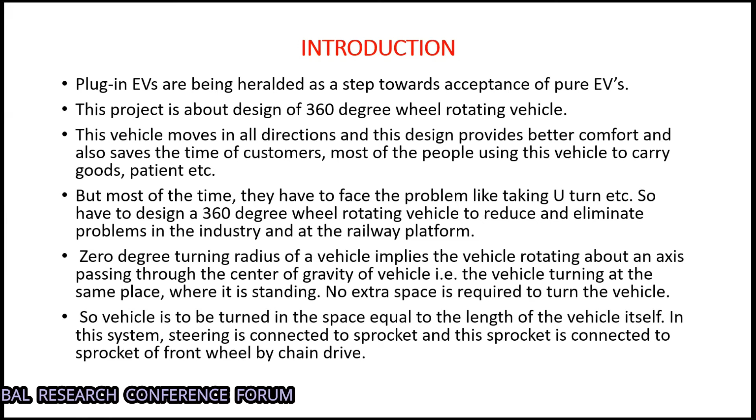In the system, steering is connected to a sprocket and this sprocket is connected to the sprocket of the front wheel by chain drive. Concept and technology. The steering sprocket is used to provide the direction of the front wheel. The DC motor is connected to a sprocket above the frame. When power supply from the battery is connected to the DC motor, rotary motion will be transferred from the DC motor to the wheel.

The bearings are provided below the sprocket, which allow the wheel rotation of 360 degrees about the vertical axis. Then the same rotary motion is transferred to the rear wheels by sprockets and chain drive arrangement. As a result, this arrangement allows the vehicle wheels to turn 90 degrees left and 90 degrees right from the original position, but the front wheel of this vehicle rotates 360 degrees by the steering sprocket and chain drive arrangement without moving from the spot, that is, the wheel has zero turning radius. This helps in maneuvering the vehicle in tight spaces such as parking lots and small compounds.

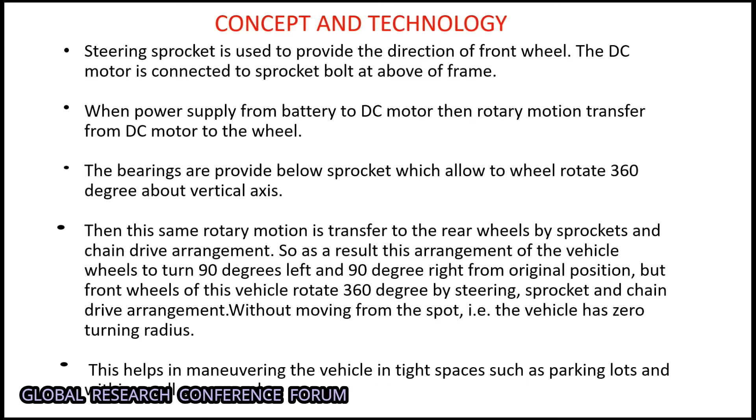Abhishek, next. The various functions of the steering wheel are to control the angular motion of the wheels, the direction of motion of the vehicle, to provide directional stability of the vehicle going straight ahead, and to facilitate the straight ahead condition of the vehicle after completing a turn. The road irregularities must be damped to the maximum possible extent. This coexists with the road feel for the driver so he can feel the road condition without experiencing the effect of moving over it.

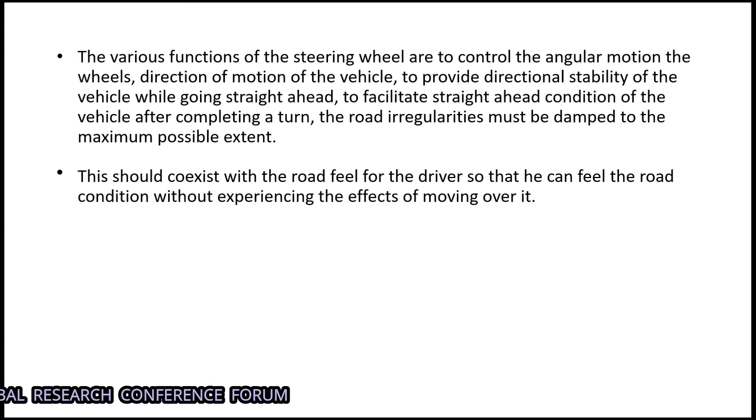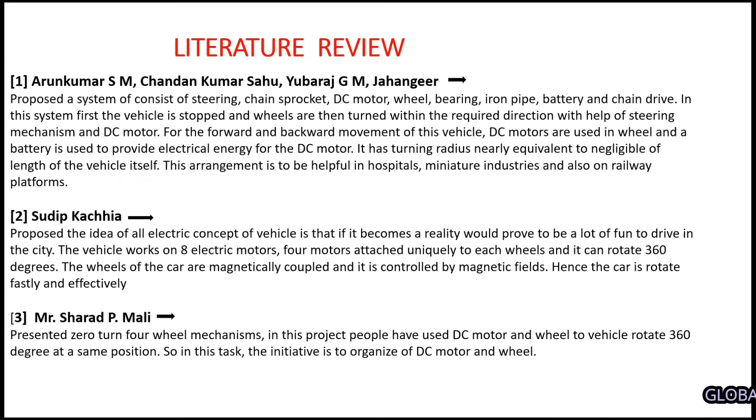Objectives of this project are designing a model of the system, reducing revolving time, overcoming parking difficulties, and turning the vehicle without leaving its center of gravity. Next slide. This is the literature review; with these references we have collected all the information for the project. Abhishek, next slide. This is the designing of the chassis and vehicle.

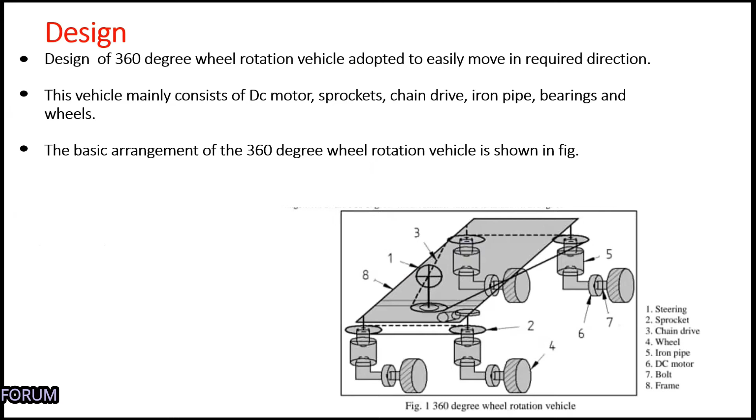The 360 wheel rotation vehicle is designed to easily move in the required direction. This vehicle mainly consists of DC motor, sprocket, chain drive, iron pipe, bearings, and wheel. The basic arrangement of the 360 wheel rotation vehicle is as shown here. The components used for the vehicle. Freewheel sprocket. A sprocket is a profiled wheel with teeth, cogs, or even sprockets that mesh with a chain. The sprockets are used for power transmission between steering and wheel through the roller chain drive. It consists of a ball bearing inside and edges outside. It fits in the chain and rotates when the chain starts rotating.

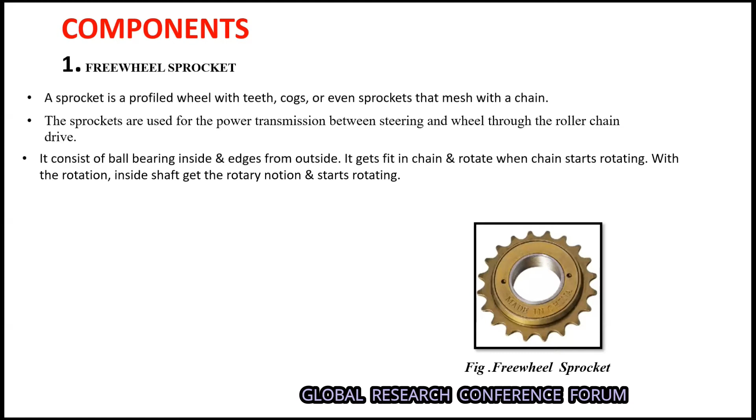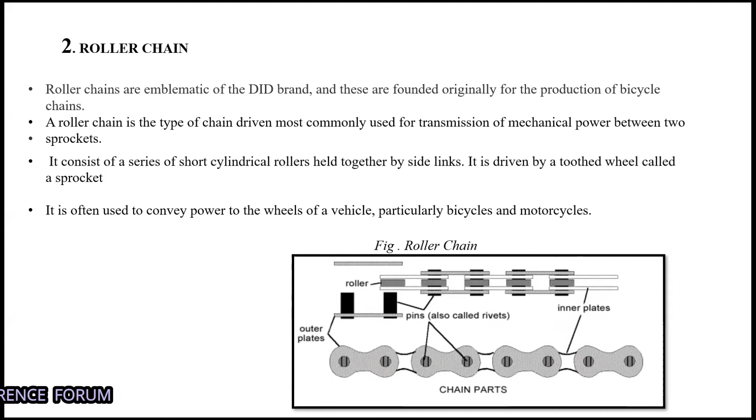Chain. Roller chains are emblematic of the DID brand. A roller chain is a type of chain drive most commonly used for transmission of mechanical power between two sprockets. It consists of a series of short cylindrical rollers held together by side links. It's driven by a toothed wheel called a sprocket. It is often used to convey power to the wheels of vehicles, particularly bicycles and motorcycles.

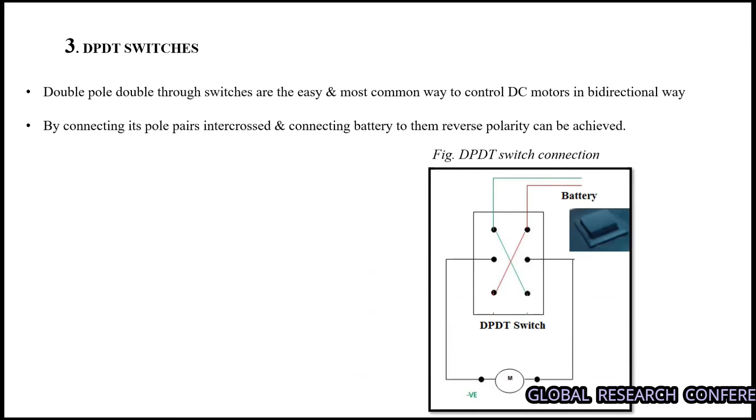DPDT switches, double pole double throw switches, are the easiest and most common way to control DC motors bidirectionally; by connecting the pole pairs crosswise and connecting the battery to them, reverse polarity can be achieved.

The motor we will be using here is a side shaft 12 volt Johnson motor. The Johnson DC gear motor offers custom engineering solutions based on a wide range of low voltage DC and high voltage DC motor platforms. The low voltage DC platform provides power density and compact packaging options. This is a permanent magnet type DC motor with high torque. The main features of the motor are: rotation per minute is 200 with gearbox. Output torque ranges from 5 kg-cm to 7 kg-cm. No load current is 800 mA.

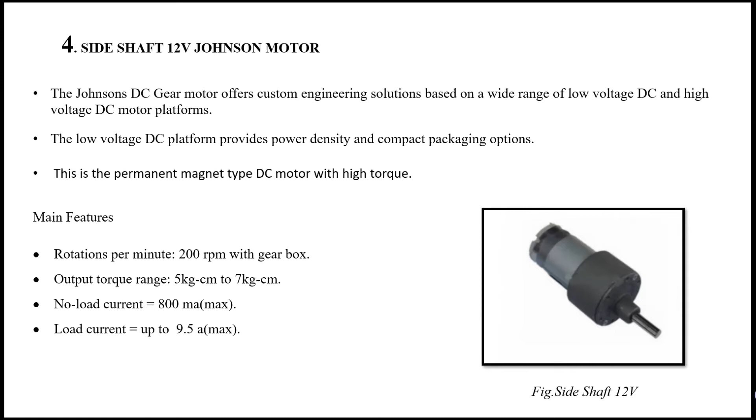Load current is up to 9.5 ampere maximum. Center shaft 12 volt DC motor. DC motor in this vehicle: one DC motor is provided in each wheel to move in forward and backward direction.

When power is supplied from the battery to the DC motor, the DC motor rotates in clockwise direction, and when reverse current is supplied from the battery to the DC motor, the DC motor rotates in anti-clockwise direction, which is used for forward and backward movement of the vehicle.

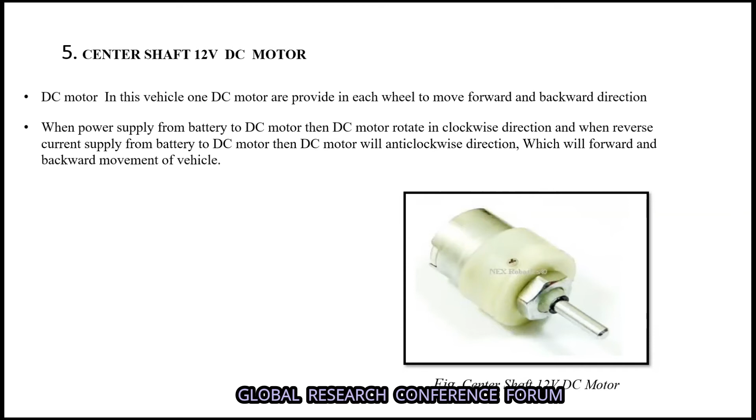12-volt sealed lead acid battery. Battery is one of the important parts of the 360-degree wheel rotation vehicle, which is connected to the DC motor by electric wire. Batteries are composed of one or more cells, each containing a positive electrode, negative electrode, separator, and electrolyte. Cells are divided into two major classes, primary and secondary.

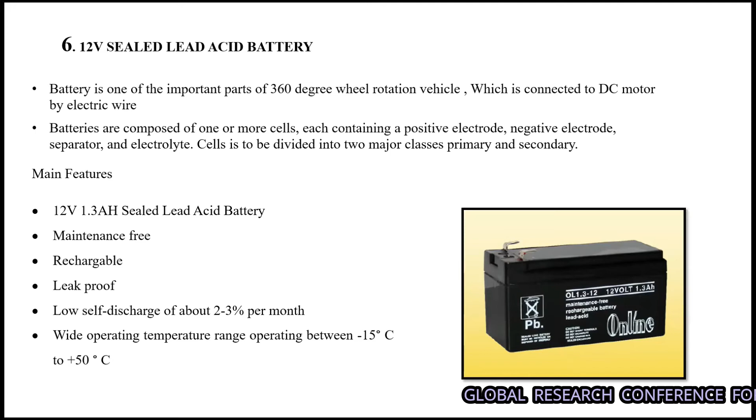Main features: 12 volt 1.3 ampere-hour sealed lead acid battery, maintenance free, rechargeable, leak proof, low self discharge of about 2 to 3% per month, wide operating temperature range operating between minus 15 degrees Celsius to plus 50 degrees Celsius.

Wheels. Iron pipe. Iron pipe is one of the important parts of the 360-degree wheel rotation vehicle. It is made up of mild steel, which is used to connect the bearing and DC motor of each wheel. Wheels in this vehicle are made up of plastic material.

Wheels are connected with the DC motor and the front wheel rotates 360 degrees with the help of steering, chain sprocket, chain drive, and bearing arrangements. The rear wheels rotate 90 degrees left and 90 degrees right from the original position with the help of the DC motor. Sprocket and chain drive arrangement. A DC motor is given to each wheel to provide forward and backward movement of the wheel.

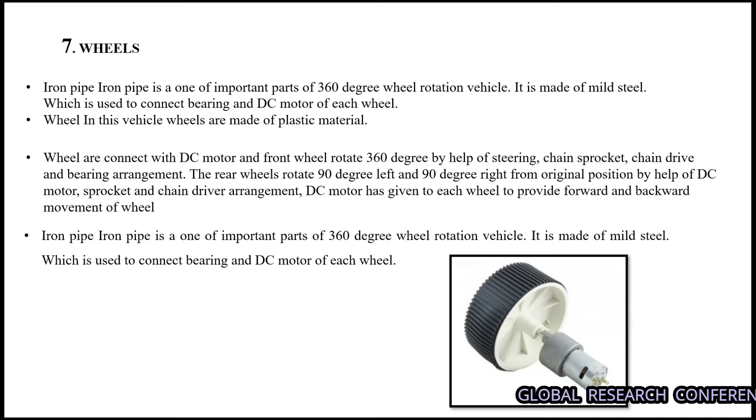Iron pipe is one of the important parts of the 360-degree wheel rotation vehicle. It is made up of mild steel, which is used to connect the bearing and DC motor of each wheel.

List of components: free wheel sprockets, bicycle chain, DPDT switches, 12 ball bearings, side shaft, 200 RPM DC motor, center shaft DC motor, plastic wheel, 12 volt battery, remote box, rainbow wires, motor clamp, 4 stud set, 12 metal rod, metal body, 12 volt single ampere adapter, plastic tie, holder metal, nut and screw.

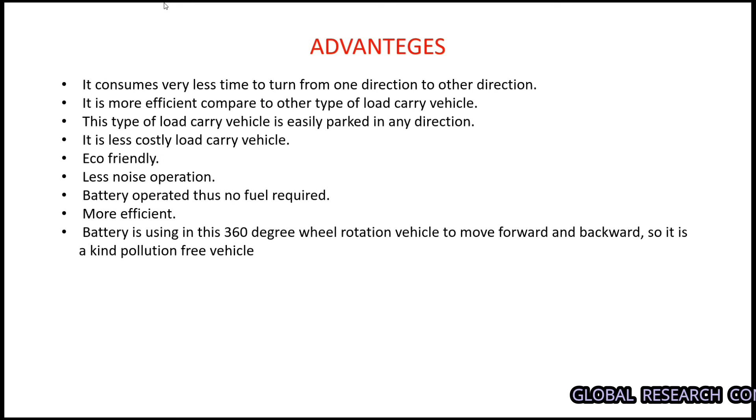Advantages of the 360 wheel rotation: it consumes very less time to turn from one direction to another direction. It is more efficient compared to other types of load carry vehicle. This type of load carry vehicle is easily parked in any direction. It is a less costly load carry vehicle, eco-friendly, with less noise operation. Battery operated, it does not require fuel and is more efficient.

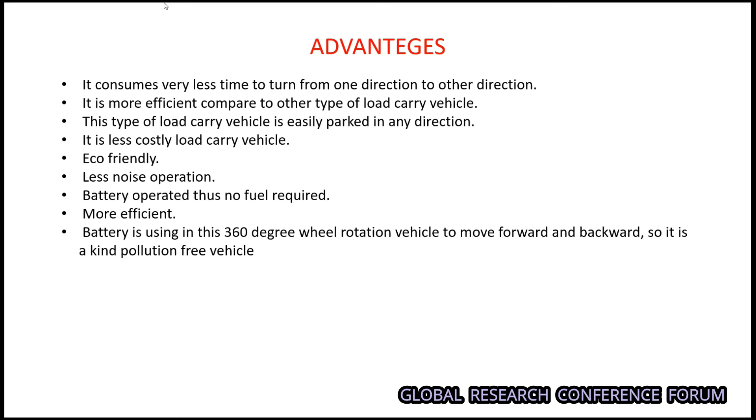Battery is used in the 360 degree wheel rotation vehicle to move forward and backward, so it is a kind of pollution free vehicle. This type of load carry vehicle is not applicable to carry more weight. Battery power is required to move the vehicle.

Application of 360-degree vehicle. In industries, for automation of raw material, like automated guided vehicle. In the automobile sector, there are so many types of vehicles we are using to carry goods from one position to another position. There is a space problem in the industry. So this vehicle is used in automobile application because this vehicle consumes very less space as compared to other types of vehicle. This vehicle is used in small industries for transportation of raw materials from one position to another position.

Modern development and economical progression of Indian society resulted in an increase of vehicles in parks. So there are so many problems. In the park, other vehicles are taking more space to move from one direction to another direction. And the 360-degree wheel rotation vehicle has the capability to move in parallel direction. So this vehicle is easily moved from one direction to another direction in the park. It easily takes a U-turn because the front wheels of the vehicle rotate freely by steering, chain drive, and sprocket arrangement.

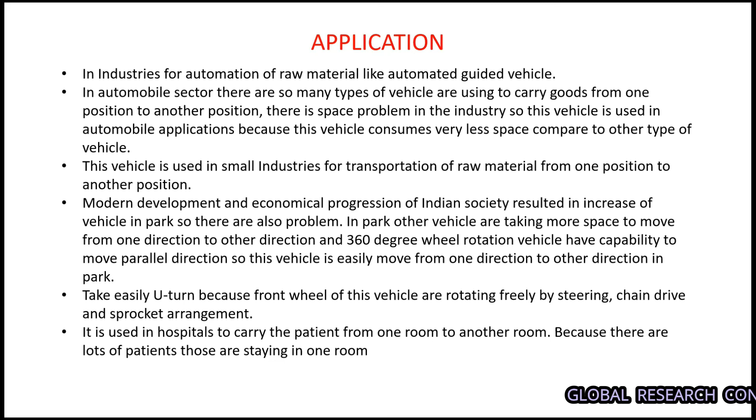It is used in a hospital to carry the patient from one room to another room because there are lots of patients staying in one room. Any questions?

Hello. You are saying that it reduces time to turn from one direction to another direction. In exactly what does it reduce, in scientific language? It can turn at its own place only. Yeah, I know that it reduces, but exactly what is it reducing? The use, man, it reduces our time. If we are taking a turn, it will reduce time.

What else? Because these rotate in 360 direction. Yeah. So what is that 360? You are saying... I'm not getting you.